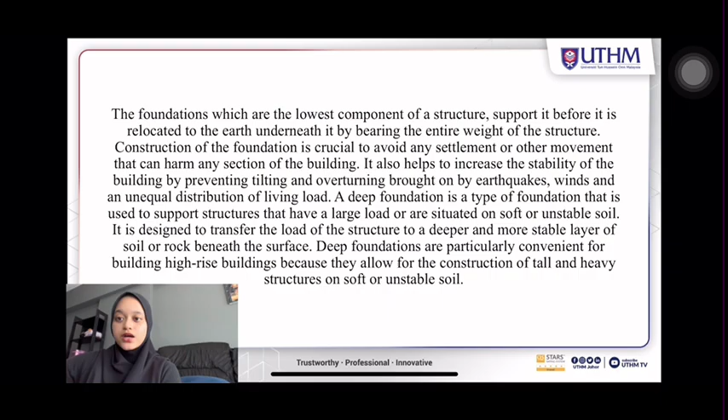Assalamualaikum and hi, my name is Ros Asyira Atasha binti Adi. My matric number is AF190212 and I'm going to explain about company information.

Our company name is Johan Engineering Sdn Bhd and the type of business we do is construction. The registration is based on the Board of Engineers of Malaysia, and the address is Prime Building, Jalan Yuk Syuk Din, 46050 Petaling Jaya, Selangor. The website is johanengineering.com.my.

Now I'm going to explain the scope of our project. This report represents the design of foundation for the design of a water tank, which is 100 ton, at IKBN Kuala Langat, Selangor.

The design of foundations includes the design of deep foundation. Designing the foundation also involves the cohesive soil at 10 meter depth of soft soil for this project, which also includes very soft soil.

So the main aim for designing the foundation for this project is to determine the types of foundation that we want to use based on the bore log report.

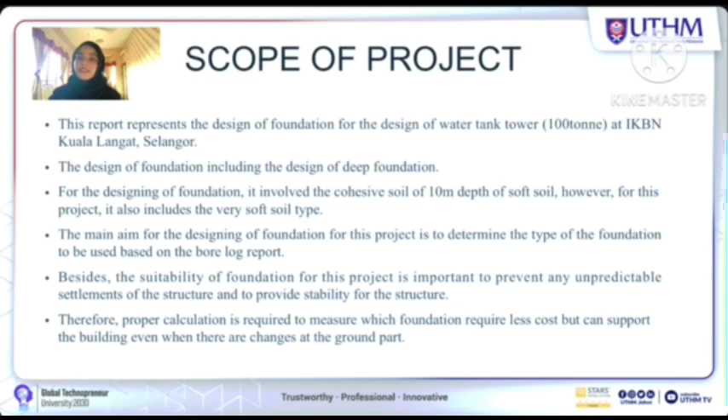Assalamualaikum. My name is Siti Nur Sakina binti Ramlan, matric number AF190211.

Next, for the description of the project, this is the site for the health facility project at IKBN Kuala Langat, Selangor. The proposed site is only 5 minutes drive from Polytechnic Banting and only 4 minutes drive from Taman Sri Putra, Kampung Pulau Areas, Taman Delima, Taman Seri, and Taman Morib.

The proposed location is 7 minutes away from Kolej Matrikulasi Selangor. IKBN Kuala Langat, Selangor is also located at the centre of Banting and is easily accessible by roadways.

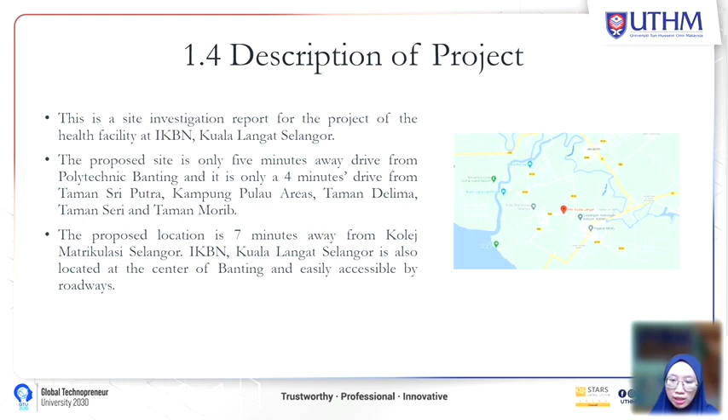For the company organisation, we have several positions: Project Director, Muhammad Fazrul Amin; Project Manager, Azarea Batrisya; Architect, Siti Norharisya Hani; Structural Engineer, Ros Asyira Atasha; Site Engineer, Nur Izyanny; and Geologist, Siti Nur Sakinah.

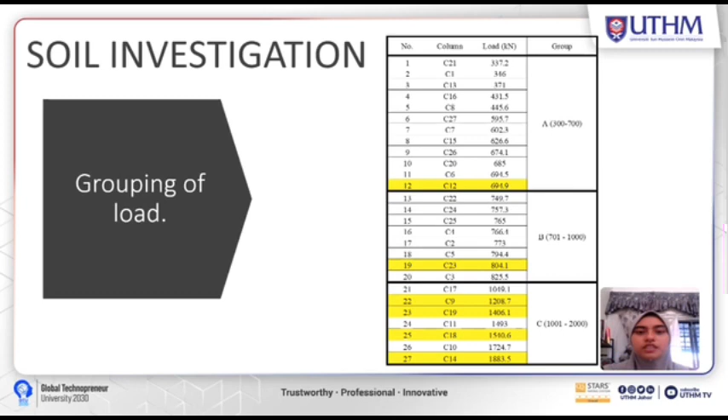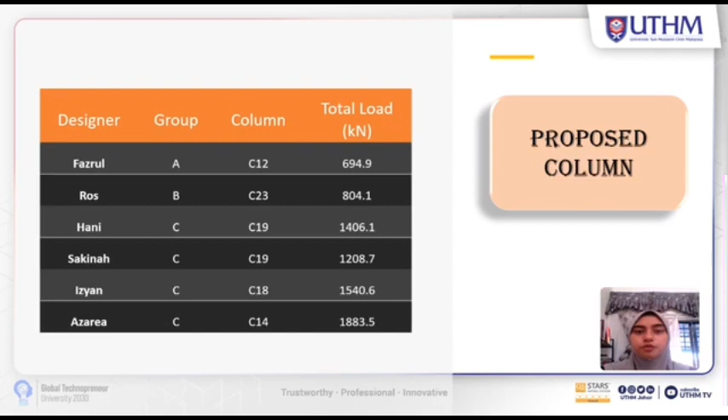For the calculation, Fazrul will calculate the load from Group A, Ros will calculate the load from Group B, while Hani, Sakina, Izian, and Azaria will calculate the load from Group C. We highlight Group C because the load from the column at this group is higher.

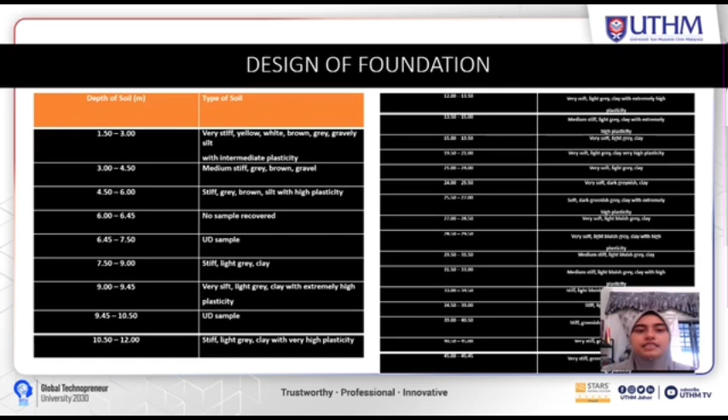This is the depth of soil in this project. Fazrul will calculate the foundation at depth 3 meters, Ros will calculate at 4.5 meters, Hani will calculate at 7.5 meters, while Azaria will calculate the foundation at 10.5 meters, Sakina will calculate at 13.5 meters, and lastly Izian will calculate at 30.5 meters.

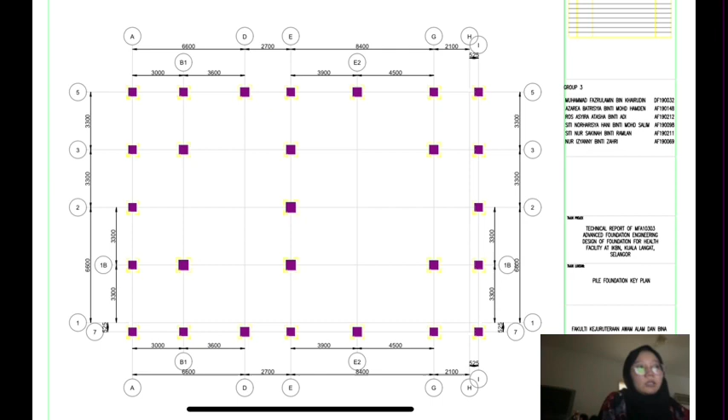I will be explaining about our structural layout. As you can see from the figure here, this is our pile footing key plan, and this layout is taken from SM software for our water tank design. Next page is our pile foundation key plan, and this layout is also taken from the SM software.

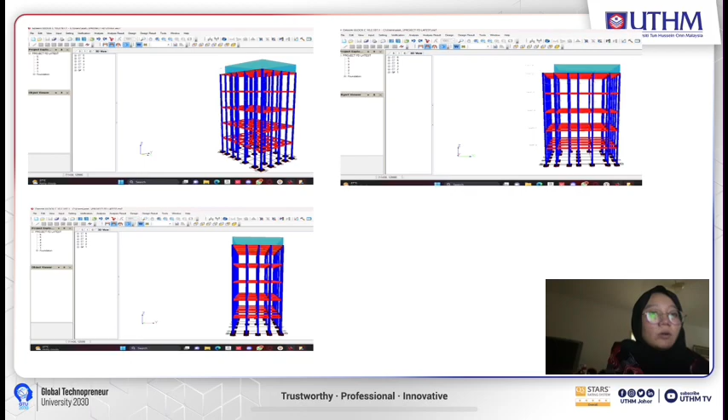For the design calculation part, I calculate for pile 450 mm times 450 mm. Loading need to design is 1208.7 kilonewton and length of pile is 13.5 meter. I got the N60 of approximately 6 meter, and then I continue to calculate for the value of QP, QU and QS. Then I go for design of group pile where I need to calculate the LG, VG, QG and also Q allowable.

The Q allowable is 1632.96. Last step, I calculate for the elastic settlement of pile by using the method of Poulos and Davis until I got the last settlement value of 38.36 millimeter, less than 65 millimeter, which is okay.

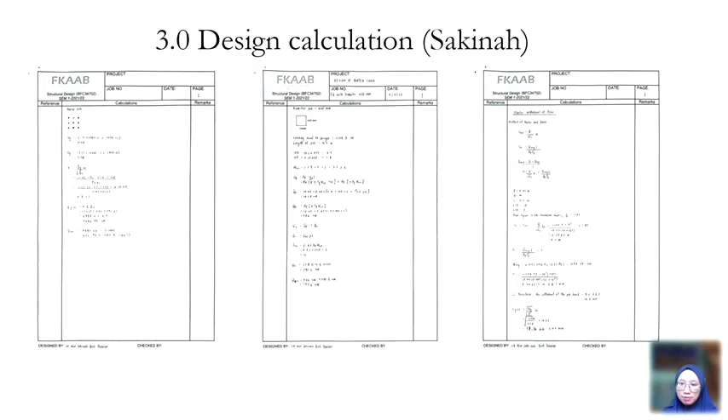So now I'm going to explain about our pile for design calculations. So for my pile manual calculation, I use column P5 C23 and the diameter of my pile is 1600, I use octagon shape and the depth is 39 meter, which is wrong, but I already did some correction in the appendices.

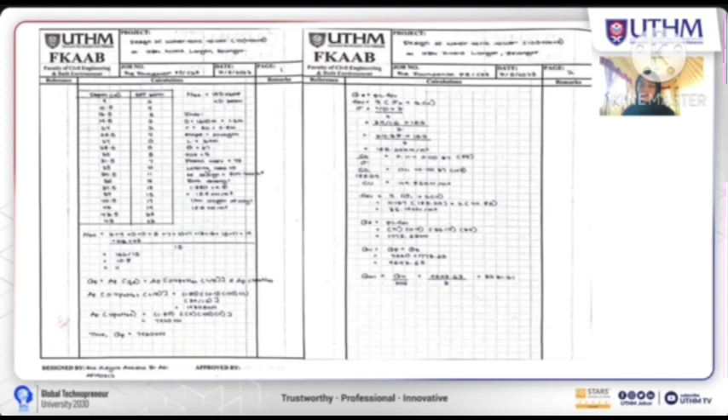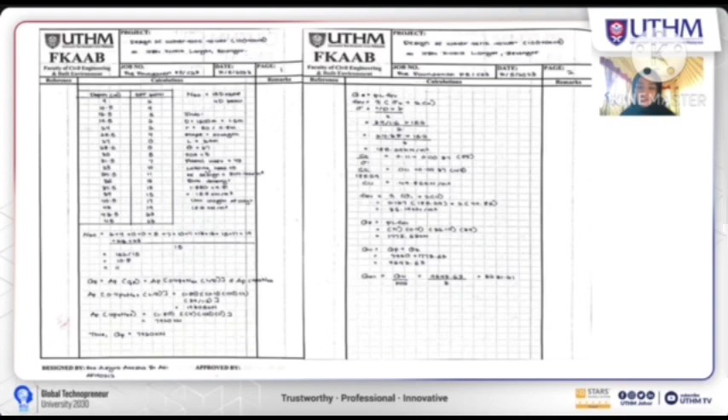The loading that need to be designed by me is 804.1 kilonewton. Q all that I get from the manual calculation is 3231.21 kilonewton, which is bigger than 804.1 kilonewton, which means that the design is okay.

For the settlement calculation, I get 43.23 mm, which is less than 65 mm. The maximum permissible settlement for clay soils is 65 mm, so that means the design is okay.

Here is the foundation design made by me, and for my design, I will design for column number 12 with the total of 694.9 kilonewton. The parameters such as depth is 3 meter, the pile diameter that will be designed is 150 mm, and the soil type is unconsolidated, which is gravel, and shape is square.

Spacing of the pile is 375 mm, and factor of safety is 3.

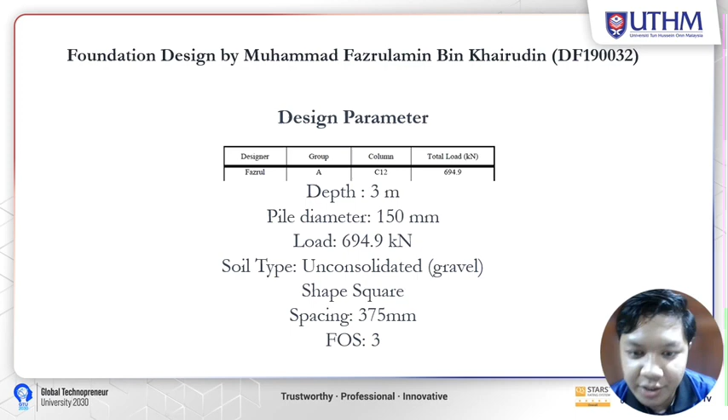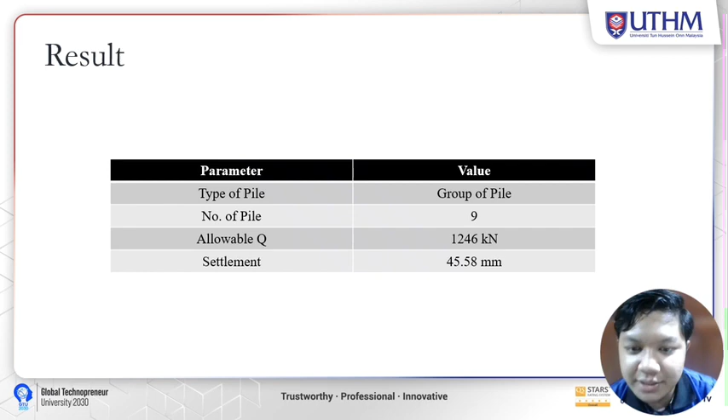So from the design, I obtained the result, which is the type of pile used is group of pile. Since it cannot sustain with a single pile, group of pile will be used. Then the number of pile is 9, and the allowable Q is 1246 kilonewton, which is more than the load required. The settlement is 45.58 mm, which is less than the required value of 50 mm. So the allowable Q is acceptable, and the settlement is also acceptable.

For the design calculation part, I calculate the pile with diameter 500 times 500 millimeter. Loading need to design is 1540.6 kilonewton and the length of pile is 30.5 meter.

I got the N60 equal to 5 and then I continue to calculate the value of QP and QS. Then the QU is equal to 366.67 kilonewton, which is less than the load that I need to design.

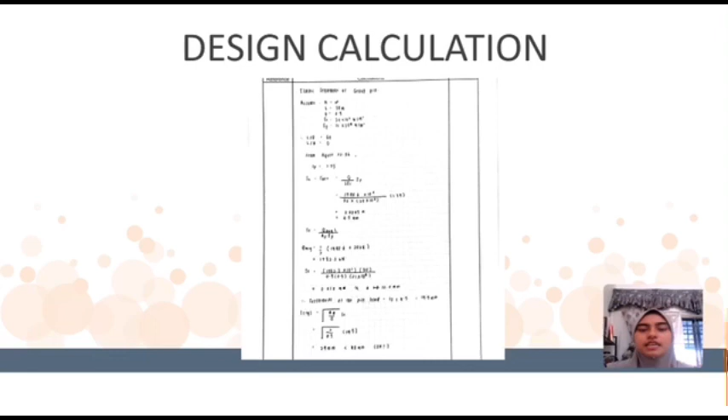So I go for design of group pile where I need to calculate LG, BG and QG. Lastly, I get the QL of group pile is equal to 2024 kilonewton, which is more than 1540.6 kilonewton. The last step, I calculate the elastic settlement of pile using the method of Poulos and Davis.

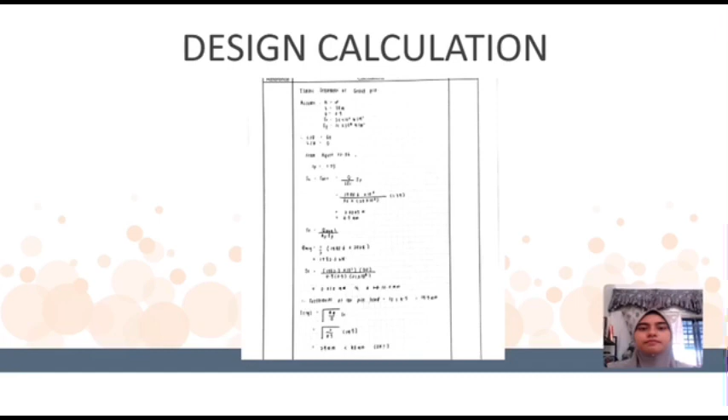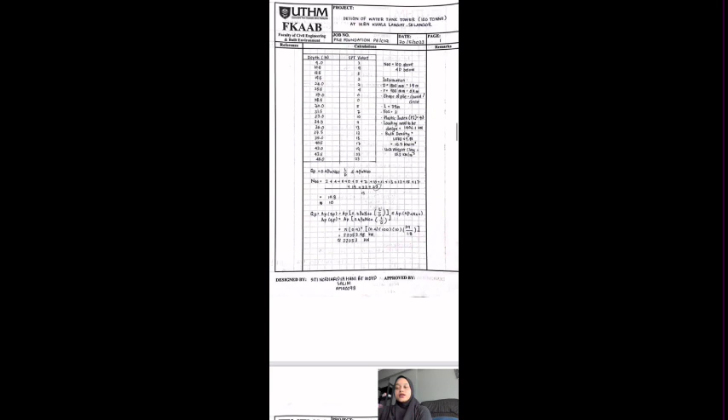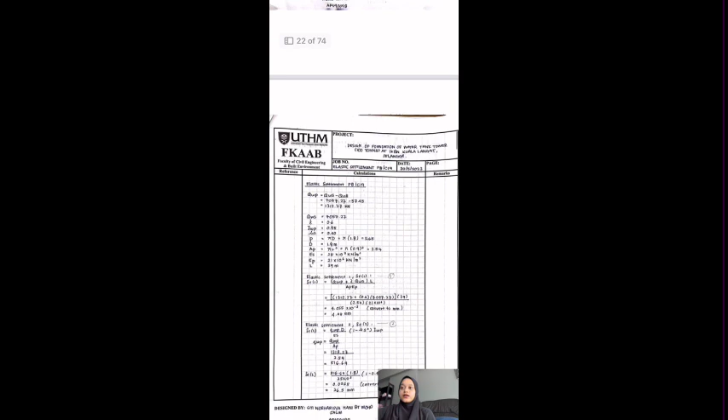So this is the manual calculation for design of the water tank tower at IKBN Kuala Langat. We are using the SPT method, and this is the step on how to determine the elastic settlement for this project. The elastic settlement must be less than 65 millimeter, and for my elastic settlement I got 30.56 millimeter. The maximum permissible settlement for clayey soil is 65 millimeter.

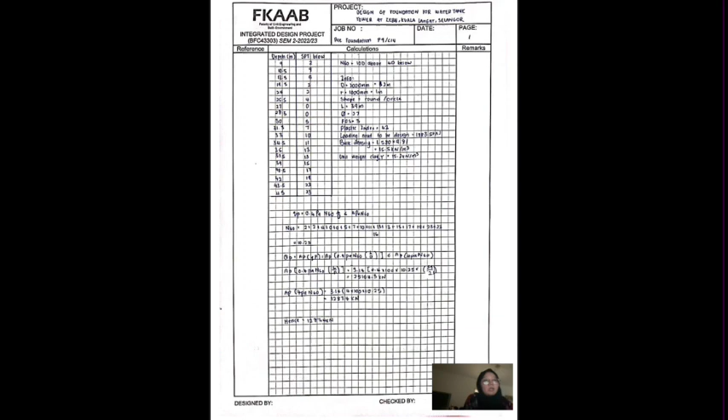For the next part is the calculation for pile foundation P9/C14. The first step is we will be using the SPT, and then the diameter is 2000 millimeter, and the shape is round or circle, length is 39 meter, and as you can see the QP is 12874 kilonewton.

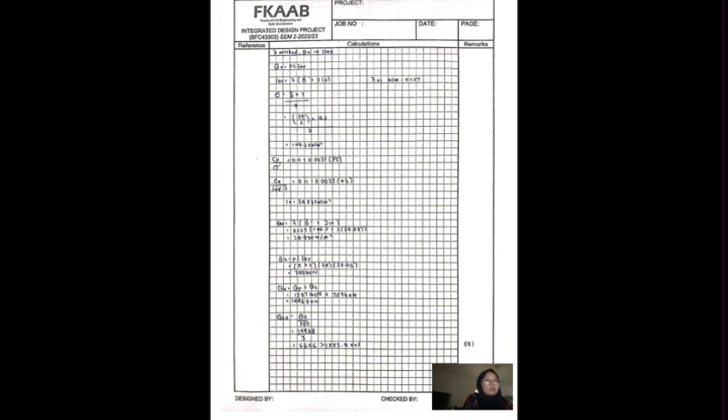Then I will be calculating QS by using the alpha method. As from the calculation, you can see that the QS is 7096 kilonewton, and the QU is QP plus QS, which is 19968 kilonewton. Then for the QO, QU divided by FOS, which is 6656, more than 1883.5 kilonewton, so the QO is acceptable.

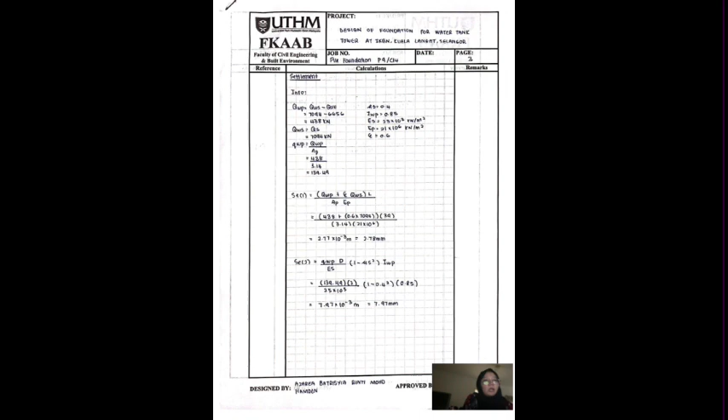Then for the next part is to calculate the settlement. We will need QWP and QWS. For settlement 1, the value from this calculation is 2.78 millimeter, and for the second settlement is 7.97 millimeter, and for settlement 3 is 3.79 exponent negative 3 millimeter. So the total elastic settlement is 10.8 millimeter, which is acceptable for clay.

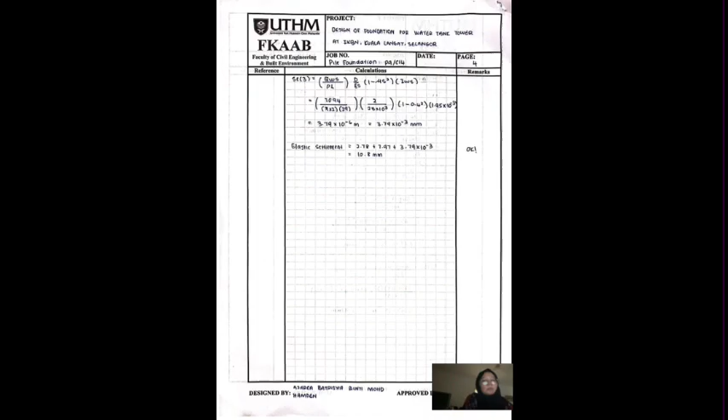For the summary of design for this project, we have 6 different types of group, which is Group A, Group B, Group C, Group D, Group E, and F. All groups have different loading from column, different diameter pile, and also different shape of pile. From the manual calculation for each type of foundation, deep foundation is used for this project, since each of the groups is able to carry the bearing capacity and overcome the settlement of the foundation.

Differential settlement poses a direct threat to the integrity and capacity of a structure. This uneven settlement of the ground could result from many activities, including changes in moisture content, vibration, and nearby construction activities.

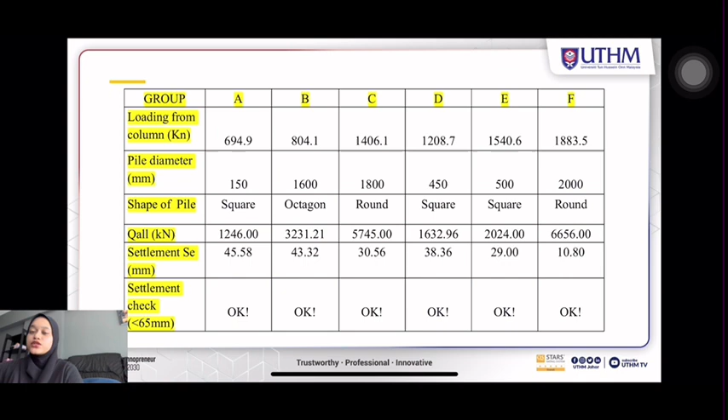In this project, for every type of different shape and diameter, the settlement value is okay because it is less than 65 mm in terms of the settlement from the manual calculation. We must be less than 65 mm because it is built on soft soil, and less than 65 mm of settlement value is the condition that we need to follow. So that's all for our group project.

So the last one is I'm going to explain the conclusions of our project. As we all know, the foundation is a significant part of a structure that helps to transmit the loads from the structure to the underlying soil or rock. In the design of foundation, the transmission of the structure load to the soil stratum with an adequate strength is very vital. Besides that, the reduction of the bearing pressure by the spread of the load over a sufficiently large area of the stratum is important as well in the design of foundation.

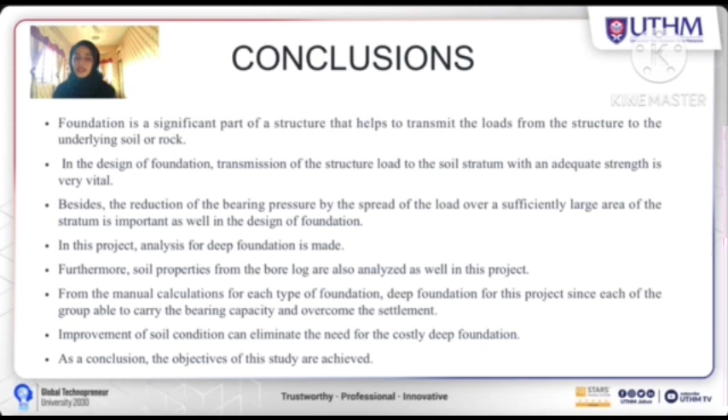In this project, analysis for deep foundation is made. Furthermore, soil properties from the bore log are also being analyzed in this project. From the manual calculations, our group is able to carry the bearing capacity and overcome the settlement. The improvement of soil condition can also eliminate the need for the costly deep foundation. As a conclusion, the objectives of this study are achieved.